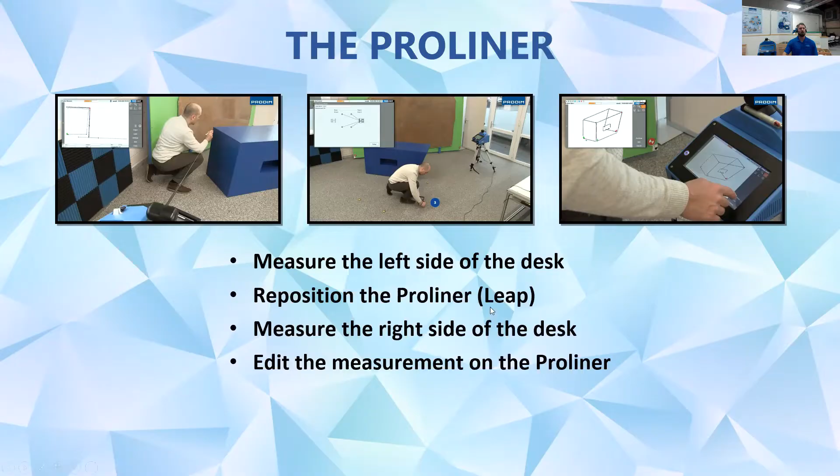So here we'll use a Proliner. It's our portable digital measuring system to record points on the desk. If you're not familiar with the Proliner, it's a contact measuring system, which the operator uses a pin tethered to the machine with a wire to touch the points on the desk. And then we use a remote to tell the machine when to take the actual points.

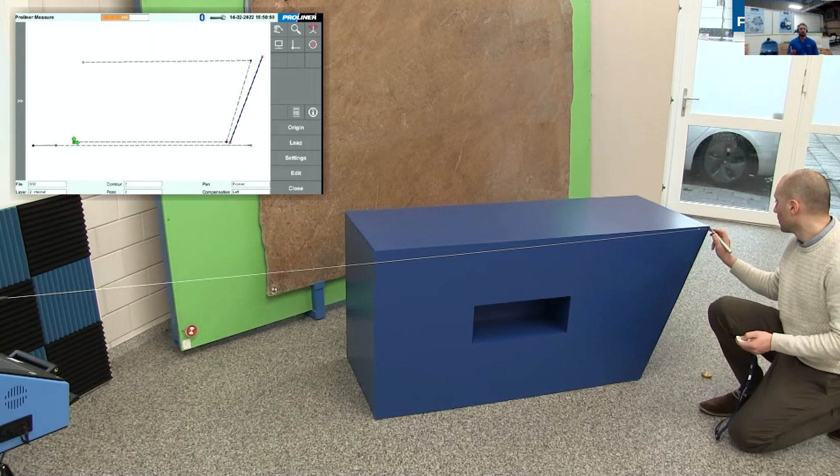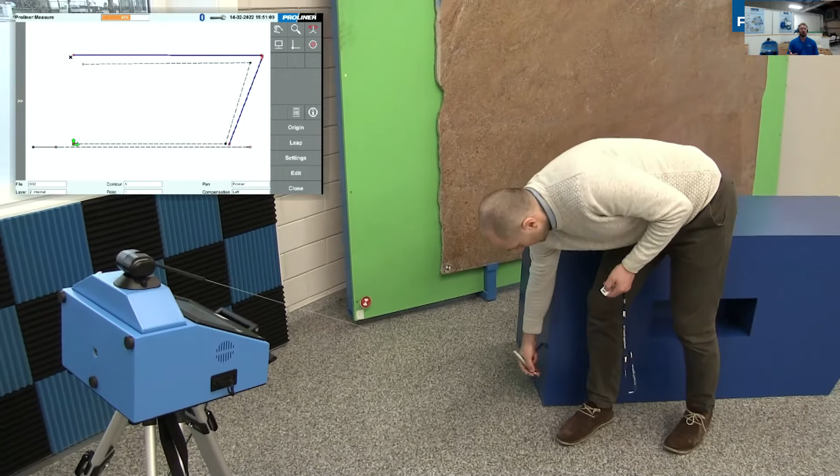The Proliner has multiple functionalities. We're going to be utilizing the multiple plane function in this video to show that you can measure multiple 2D planes and it shows them in a 3D space. So as you see, my colleague here measured a couple points on the floor to just show where the ground was, and then we change a layer or change to a new plane to set the plane on the front face of the reception desk here.

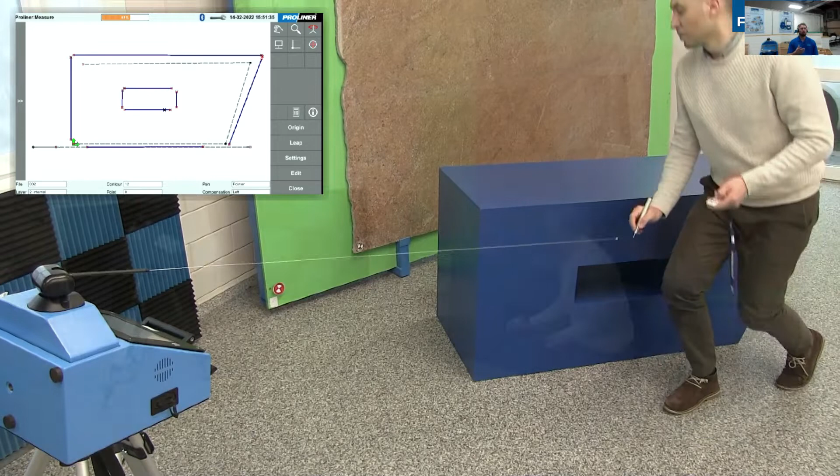And we're going to go and measure the perimeter, as you saw that he did there, and now he's measuring the cutout. If you're a Proliner user already, you know you just need 2 points for a straight line, and then we break the line to go to the new line there. And you don't want to measure directly into the corners because the CAD on board the Proliner will take care of filleting the corners for you.

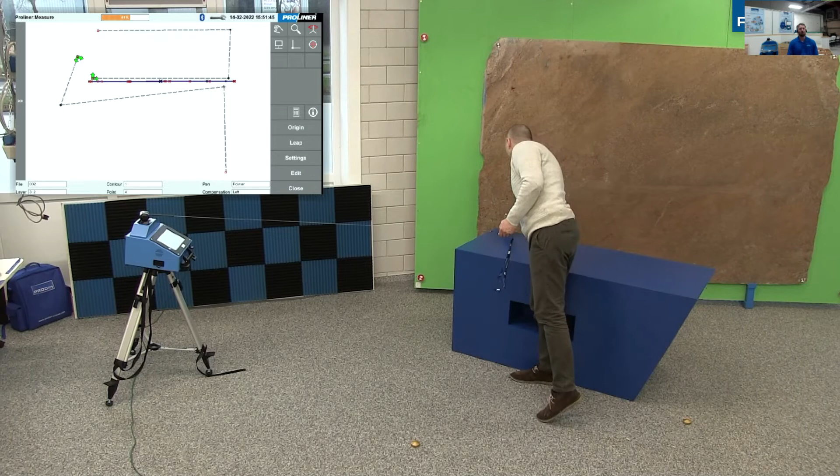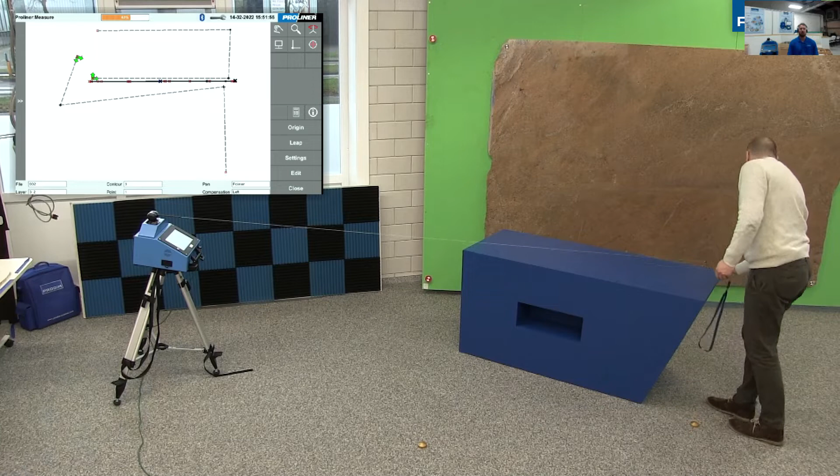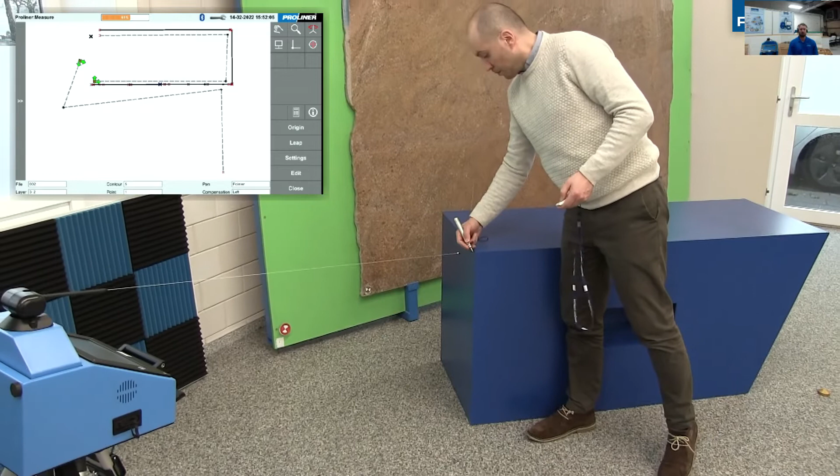Once we got the front face done, now we're going to move to the top face on the desk. Hitting and holding the 3 button on the remote allows you to change a layer or to change to a new plane. And the first step, like you saw in the video, he's going to set a plane on the top face so the Proliner knows where it's measuring to. And then you're just going to measure the perimeter. And you just keep moving along like this until you get every face that you can from that position.

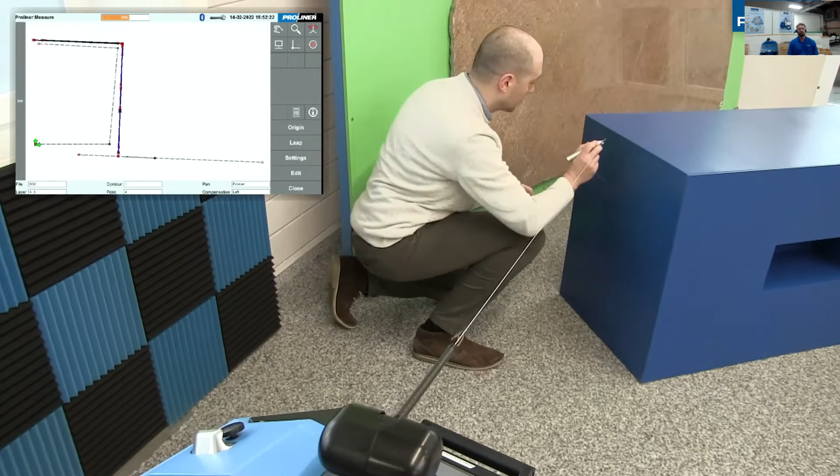So again, setting the plane on this left face, and then measuring the perimeter just by touching points on the face or the other faces of the object to be measured. And then we're going to measure 2 points for the floor. Now we can go back to the machine and sort of rotate the drawing. You can kind of see everything in multiple 2-dimensional planes, and it shows in a 3D space.

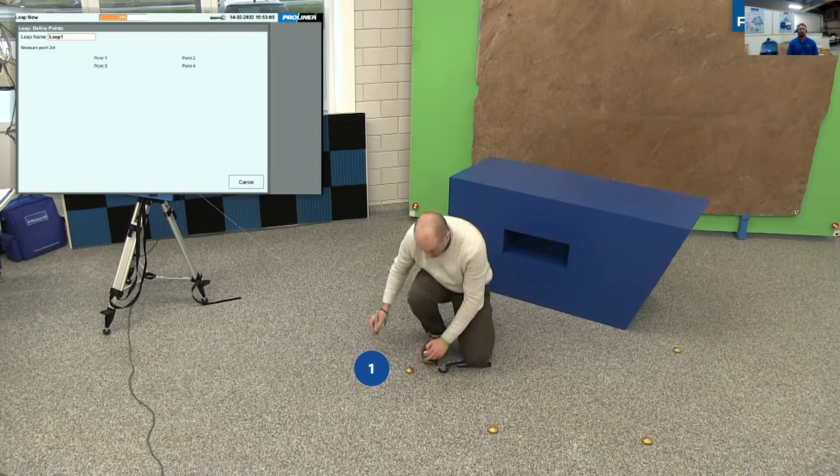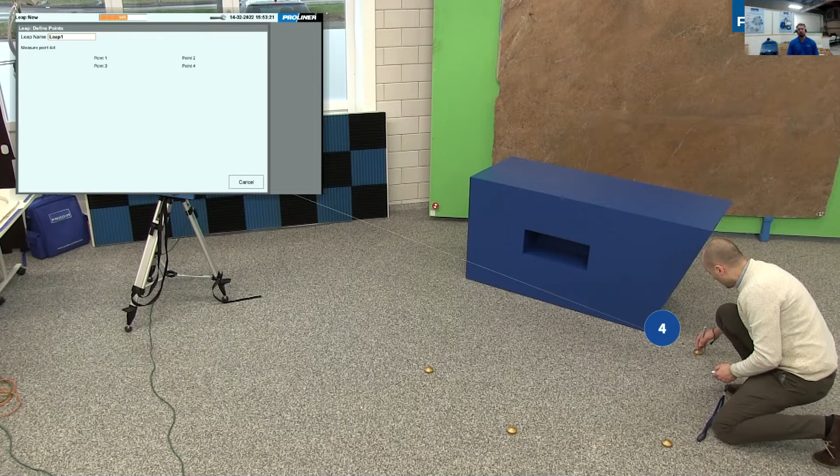Now we're going to utilize the leap function that's built into the Proliner. The leap function allows us to reposition the machine while still keeping the accuracy of the file together. So how the leap works is you have 4 points that you put in space. They can't be in a straight line or like a perfect square. They need to be in some sort of asymmetrical shape. You set those points out that you can reach from position 1 as well as position 2.

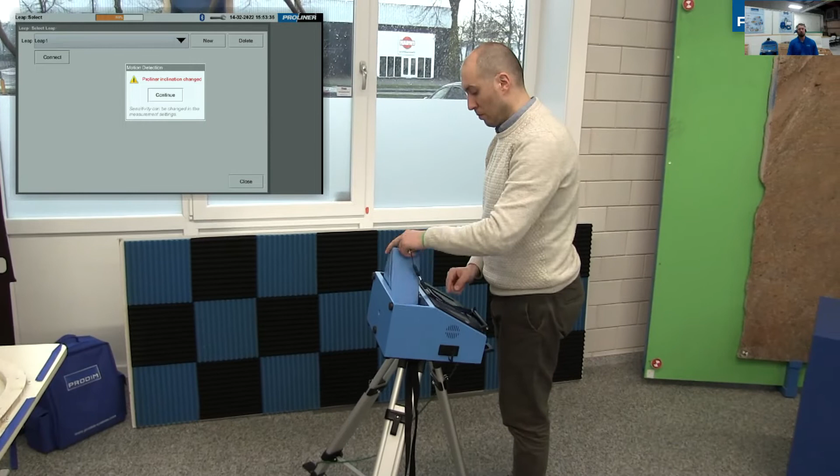And you measure those 4 points from position 1, you create the leap. Once the leap's created, we're now able to move the Proliner to position 2 so we can get the rest of the measurement that we couldn't reach from position 1. So we'll take the Proliner, move it over to the other side.

You see on the screen there, the Proliner has a motion detection or inclination change detection built inside of it. So if you don't want to move the Proliner and somebody accidentally kicked the tripod or something while you're measuring, it can alert you of that as well.

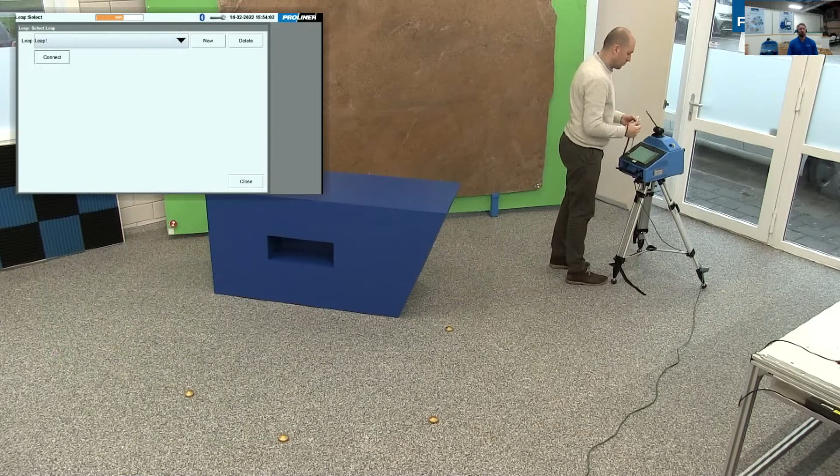Once you get it into position 2, we can connect the leap. So we created one leap here. We're connecting to leap 1, and then we're going to go and measure those 4 points again. The order does not matter here, which is very nice. You don't have to remember. And we also utilize 4 points, so that makes it the most accurate repositioning you can get.

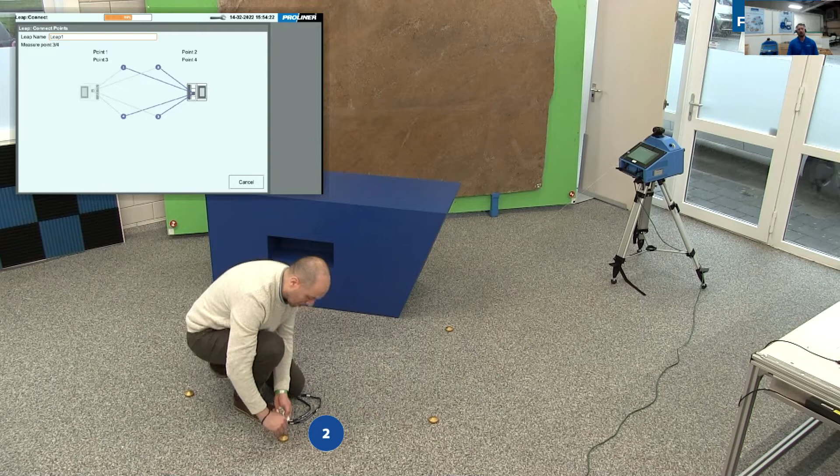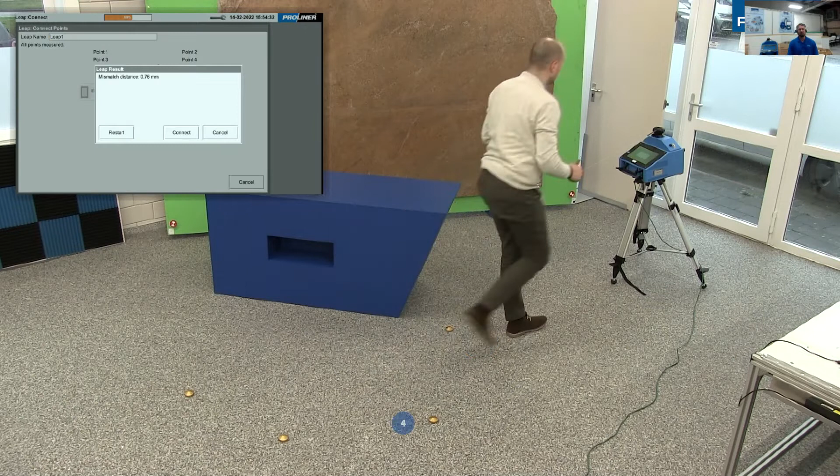You'll see here, it's going to give you a mismatch result of what the leap accuracy is. It's usually, as you see, about 0.76 millimeters, about 30 thousandths of an inch. And that's usually in tolerance with everybody. Once you are happy with the leap, you just hit connect, and then you can continue measuring to the side that you couldn't reach from your position 1.

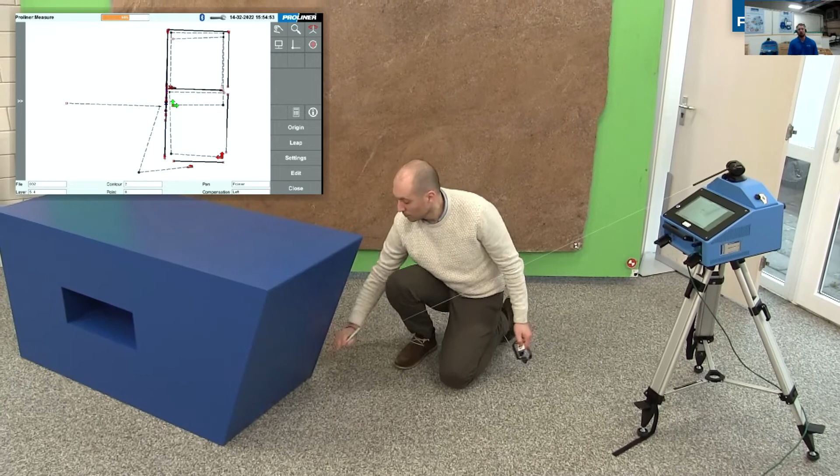This is a very versatile tool on the Proliner. It allows you to really be unlimited with the measuring.

And now we can measure this inclined angled face of the desk here. Again, just setting the plane and then measuring the 4 faces of it.

So that's the measuring process. Pretty simple, pretty quick. And we can go and view it on the Proliner, rotating the drawing in 3D to make sure that we got all the lines that we needed.

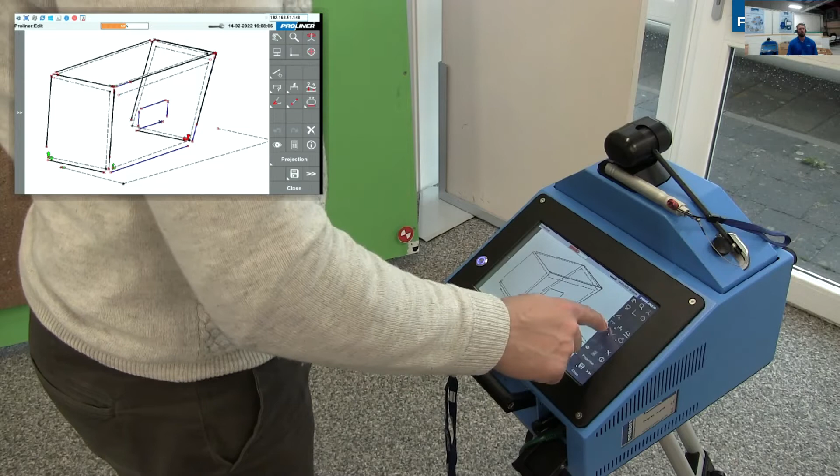Then if we hit edit here on the screen, this brings us into the onboard CAD software that's on the Proliner itself. This is our CT software. And what we're doing here is just labeling the layers, so when we bring it into the Prodim factory software, it's a little bit more organized. We know which face is which, which just allows for quicker processing of the file.

And this can be done, this is a really good tool to use, especially when you're measuring multiple planes.

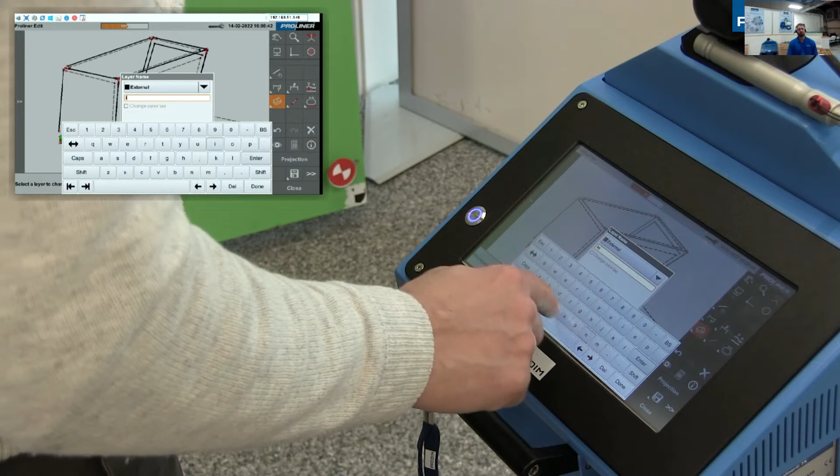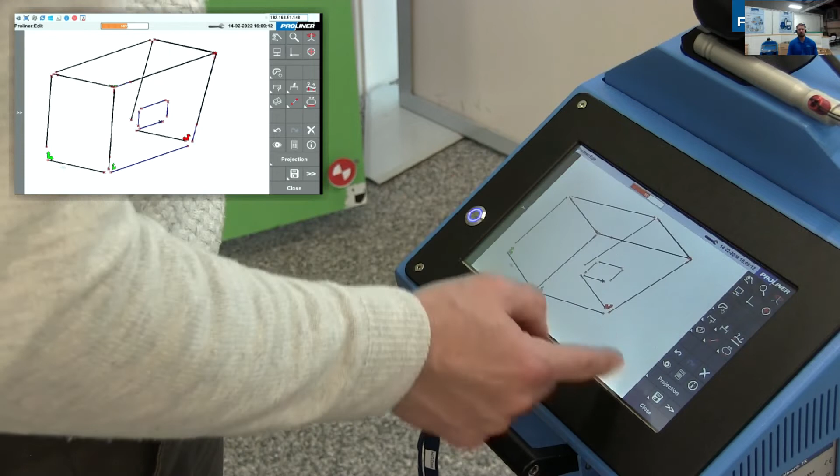Once the faces are labeled, we'll go around and delete all of our lines that we set for our plane, so it's unneeded geometry now. The Proliner will identify those. There's a function in the Proliner to make those a dotted line, so you can identify which lines are which. It makes the drawing a little cleaner and less confusing for you.

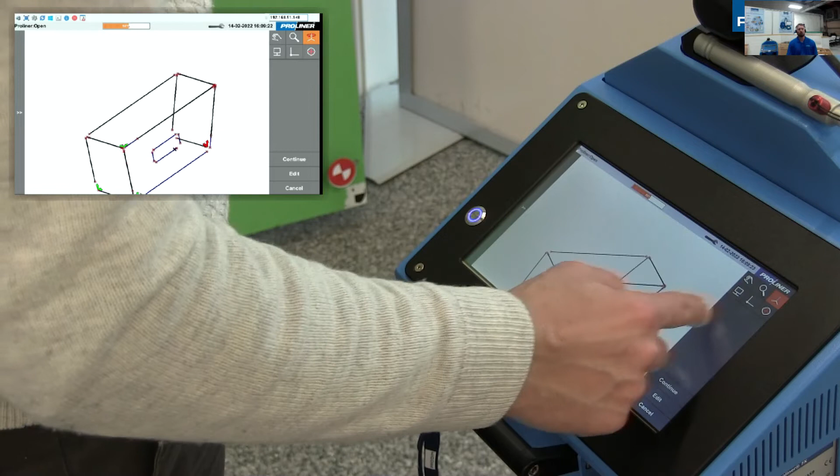Again, just sort of rotating it, looking at everything, making sure we got everything. As you can see, we have a layer list on the Proliner, which shows you the layers that are involved.

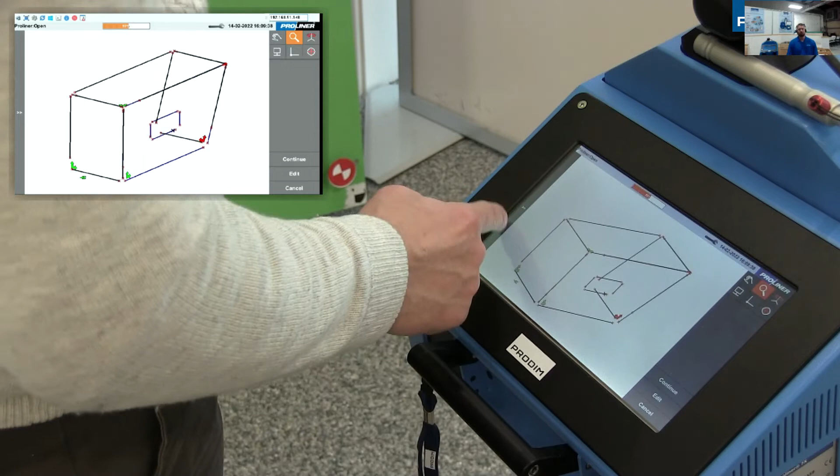And you can actually turn layers on and off, so what we're gonna do right now is single out one layer that you wanna work on to add your fillets and do any CAD that you need to in the field.

Right now, we're just filleting all the corners to connect them on this front face.

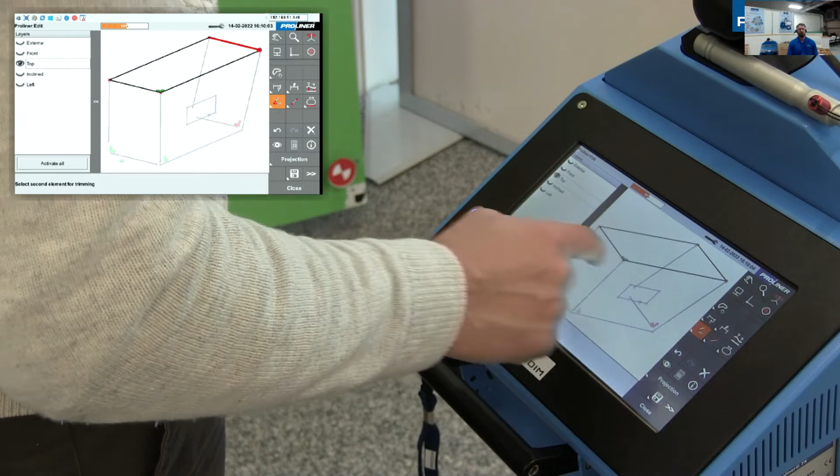Now we're gonna just isolate the top layer and enclose everything on the top layer. Same thing with the incline piece, and then on the left side.

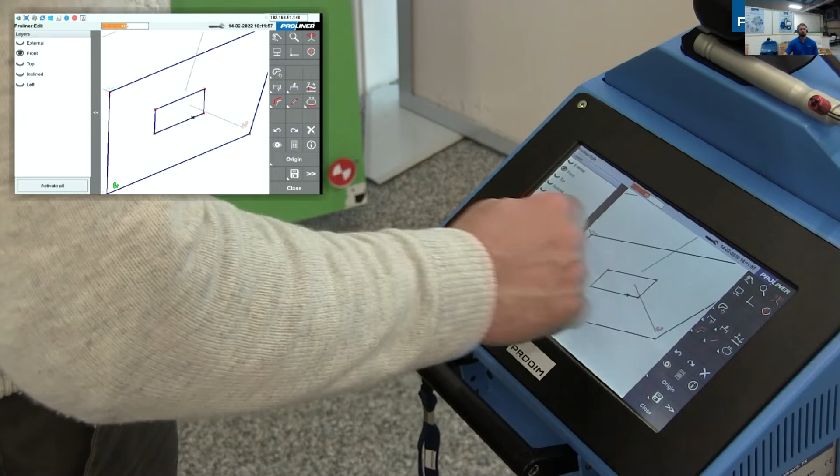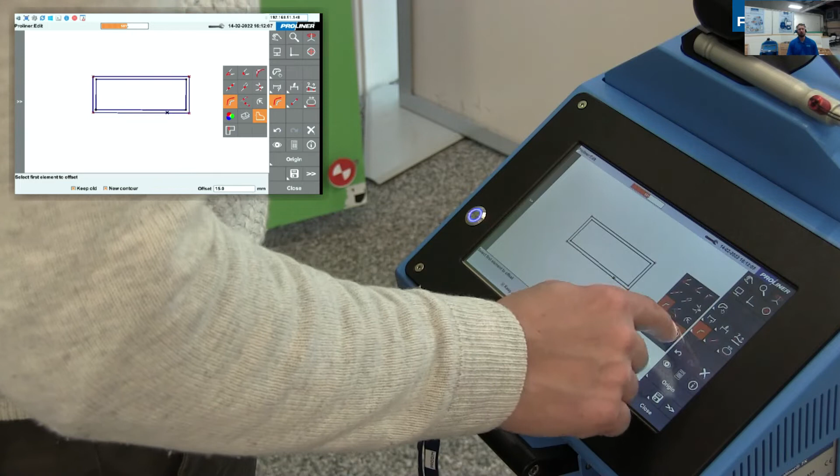We're going to origin out the drawing. Now you can actually utilize a feature in the Proliner to bring that into a top view. And what that'll do is now you can basically do your offsets and everything, looking at everything from a plan view.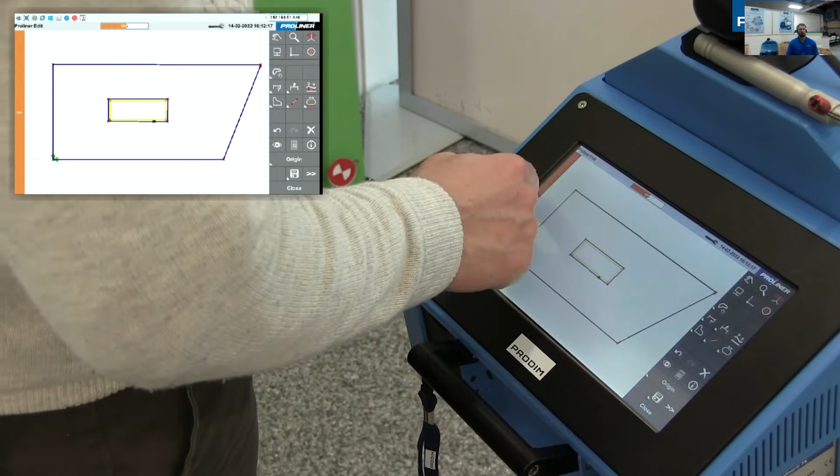We're gonna utilize the profile tool in the Proliner to label the particular edges here, whatever profile that we want to label them as.

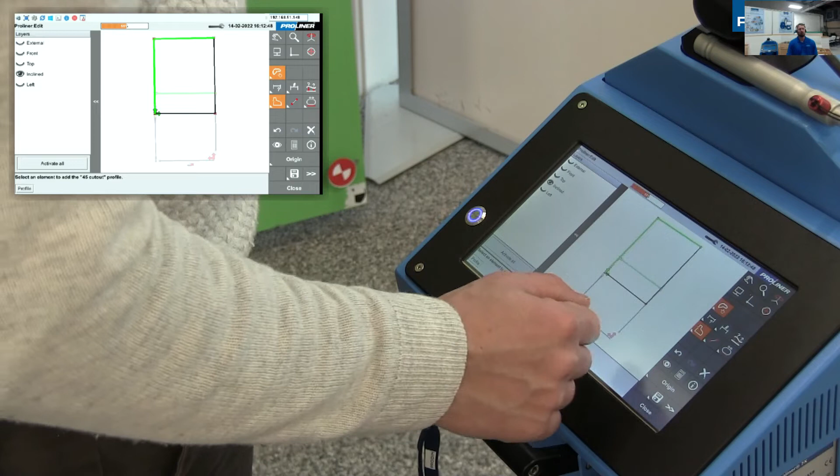So you can have a mitered profile. We have a 45-degree cut profile here, which is green. So every line that's going to be on that mitered profile will be labeled green.

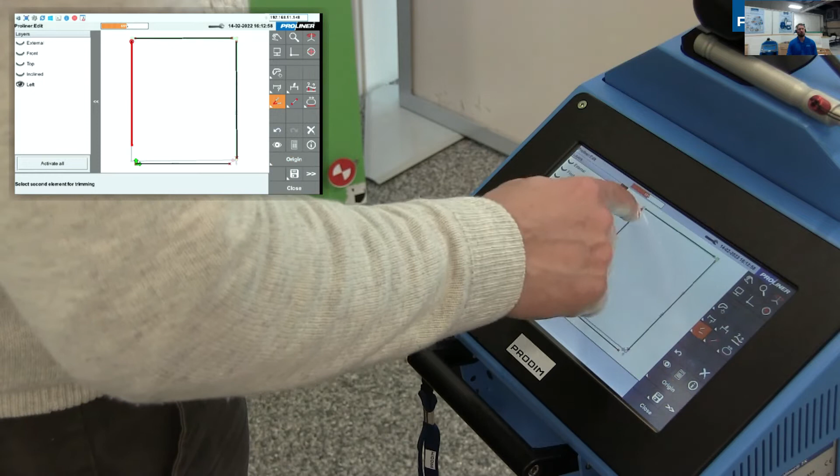We're going to go ahead and just close everything up on the left side.

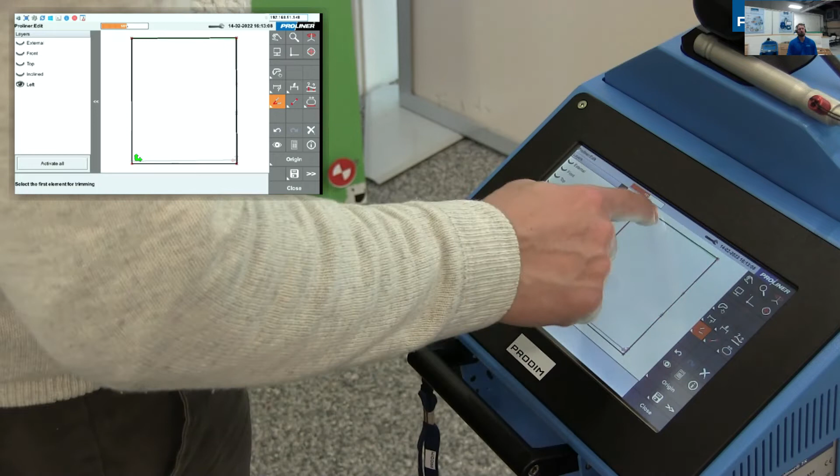Again, go back to our profile library. So the library in the Proliner, you can customize this and add all different types of profiles that you need to, or that is custom to your company, especially like if you're doing miters a lot. It helps identify which lines need to get that particular profile.

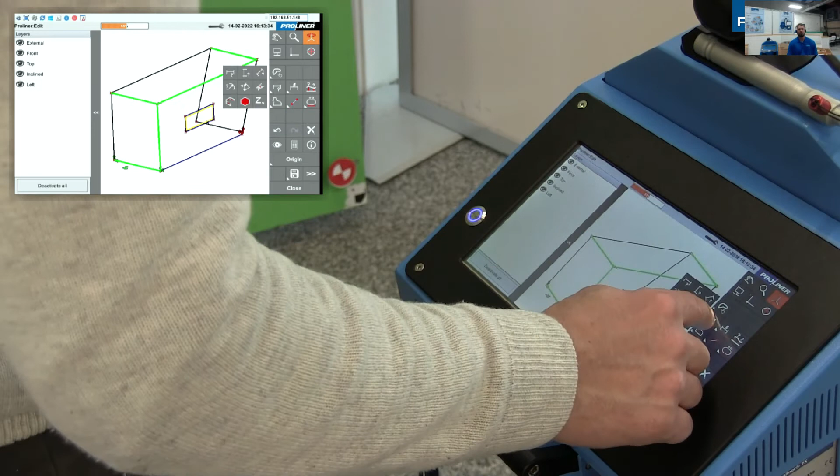Then we can add some dimensions here, just so you can verify this on site while you're here, just to make sure everything was done correctly before you leave.

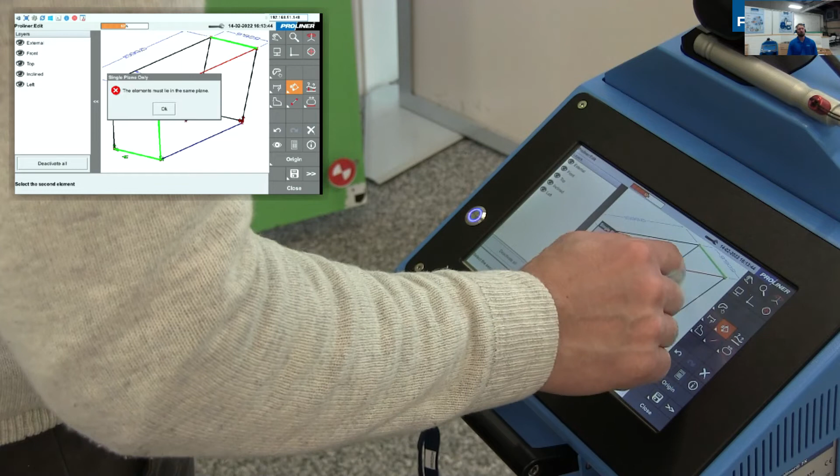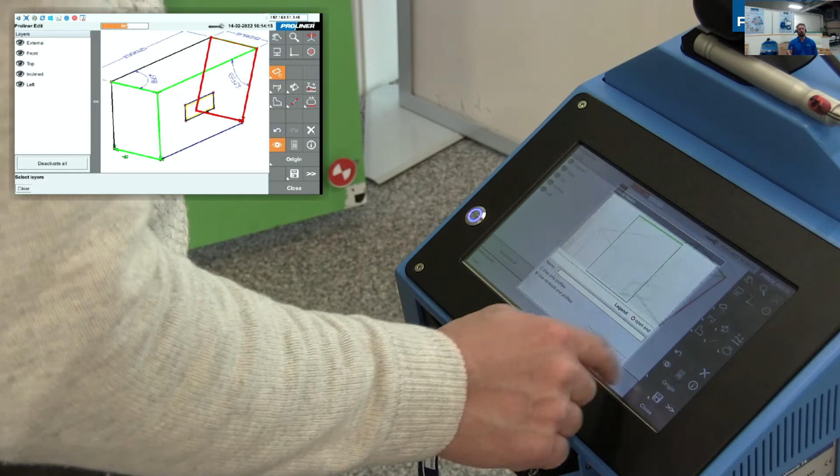Once we get all those dimensions there, we can create what we call production pieces. So these production pieces, or sketches, allow us to single out the particular piece or edge, because we measured this with 5 different planes. So we want to make a production or sketch piece for each of the 5 pieces.

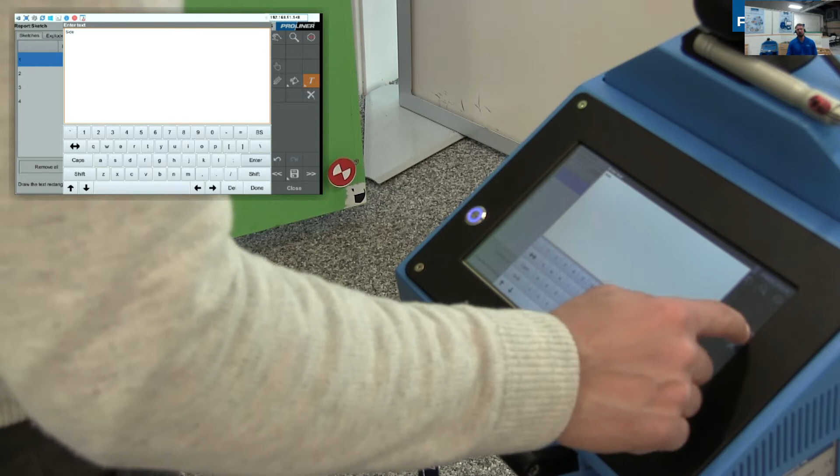And then we can bring it into the sketch or production menu on the actual Proliner itself. This is where you can add some notations and more dimensions here. This then will be exported out of the Proliner as a PDF file, so it makes like a production shop ticket for you.

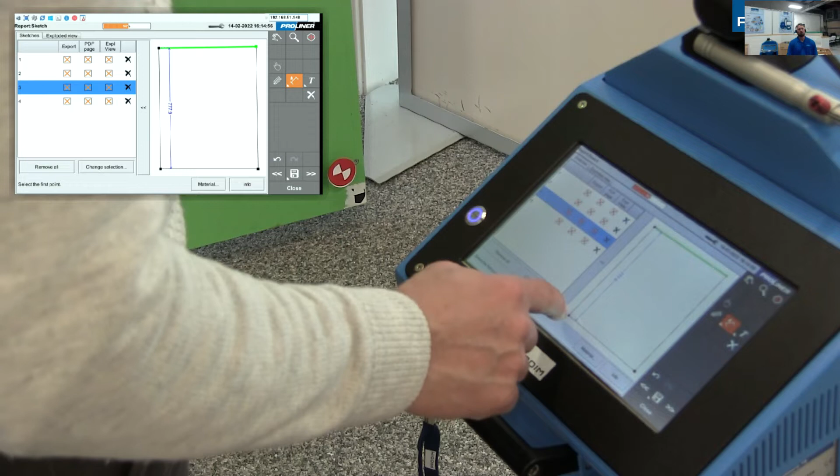See, we're adding the dimensions to each piece. Again, this is a really cool tool if you want to add any notations that need to go from the template to the shop.

Over here we can label, or customize this too. This is just some information you can add. You can make this custom template for your company and add stuff that needs to be added for the job, like who measured it, the date it was measured, the type of job, delivery date, things like that, residential or commercial.

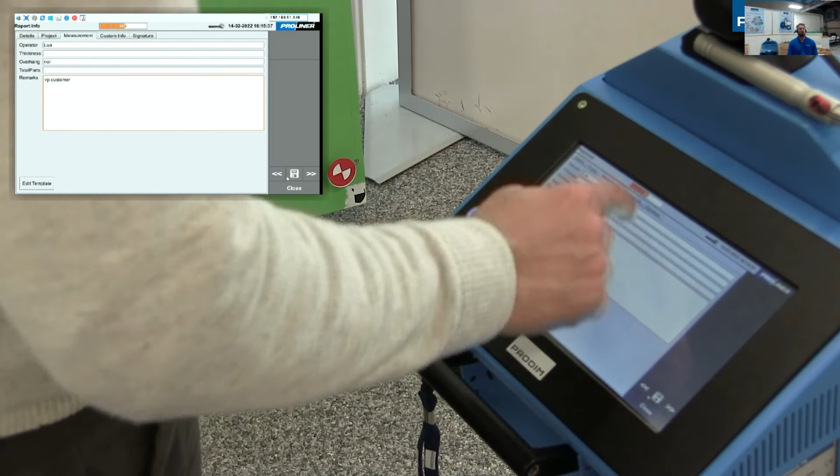You can also put different remarks in here, maybe if a customer asks for something. We'll sign off on the job, or you can have the customer sign off on it right there in the field on the Proliner.

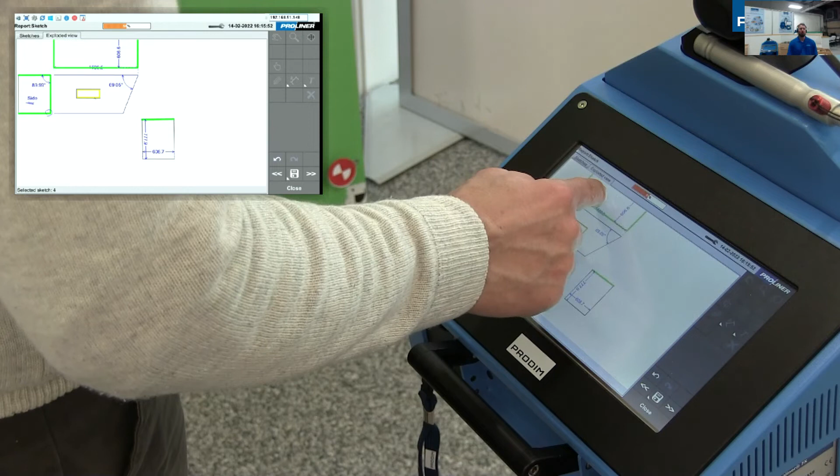And now we're just making the PDF, the shop ticket, nice and pretty, so everything looks put together when we bring it to the shop. As you can see here, we'll have a preview of it.

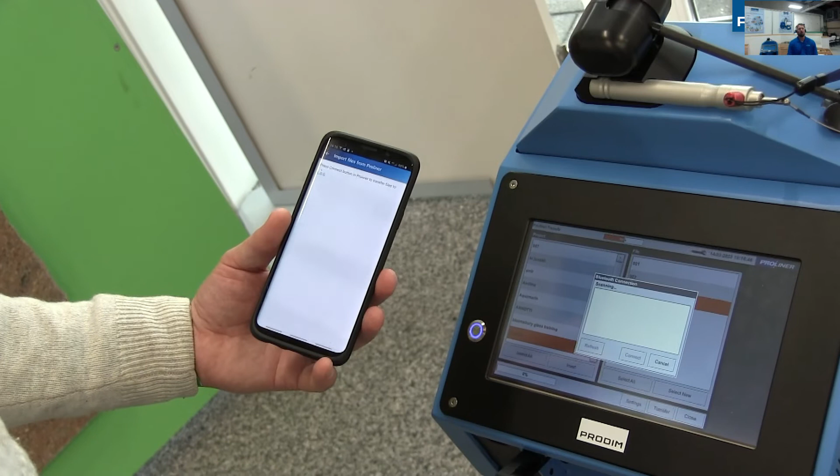Once we're done, we can export the files off the Proliner using Bluetooth to a smartphone. So we're scanning for the phone here, and the files will come directly off the Proliner via Bluetooth to the phone.

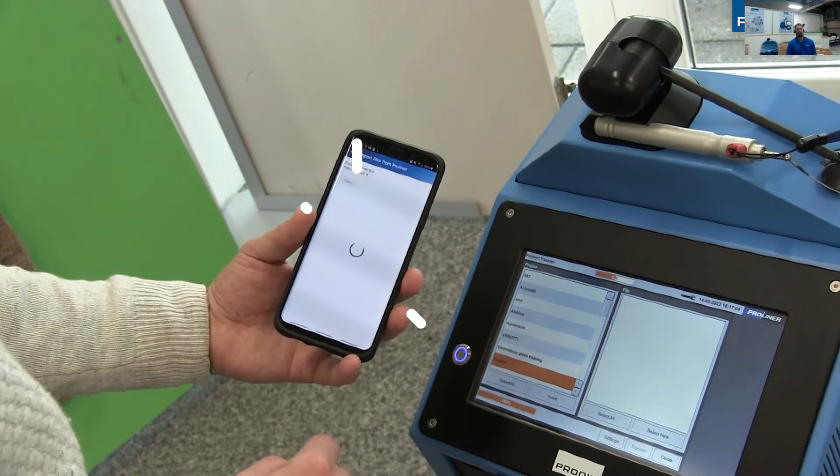Using the Prodim file transfer app, it's on the Google Play Store - you see the files just came over. You can also add pictures that will be tied into the same project folder.

And then you can export these right from the field from your phone and transfer them via email, and send them right back to the shop so they can start getting processed.

So the second portion is done with the Prodim factory software. Here we can finish all the CAD editing that needs to be done that wasn't done in the field. Most of it can be done in the field, but if anything else needs to be done, it can be done here in the Prodim factory.

This is where we can add all of our offset and thicknesses and bring it into the match portion of the Prodim factory software, where we can place it on a digital slab and create an actual saw layout that is CNC ready.

This is a little overview of what we're about to see in the Prodim factory software. Like I said, we can add the offset and the thickness of the actual material, and we're going to align all the parts.

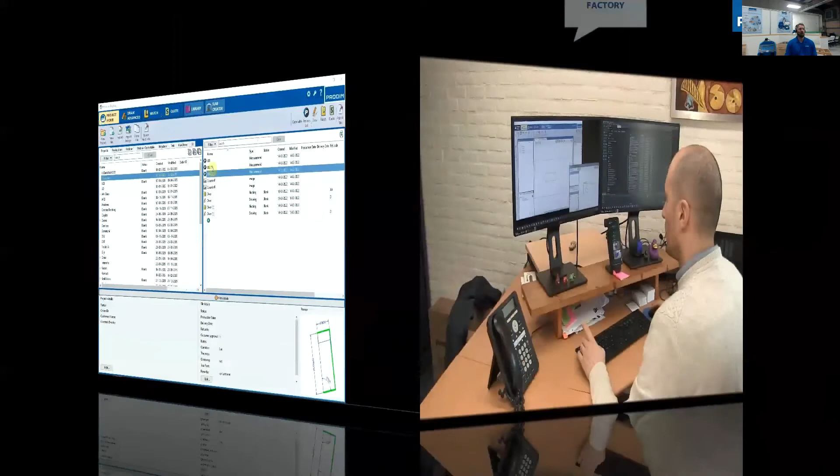All right, here we open it, and this is the Prodim factory software. So this is the project home where we import all the files into the factory software - it's like your file organization, sort of just like on the Proliner.

And when we bring it into the Draw Advanced feature on the Proliner, this is where we can actually view each piece individually, as well as in a full 2D, 3D view.

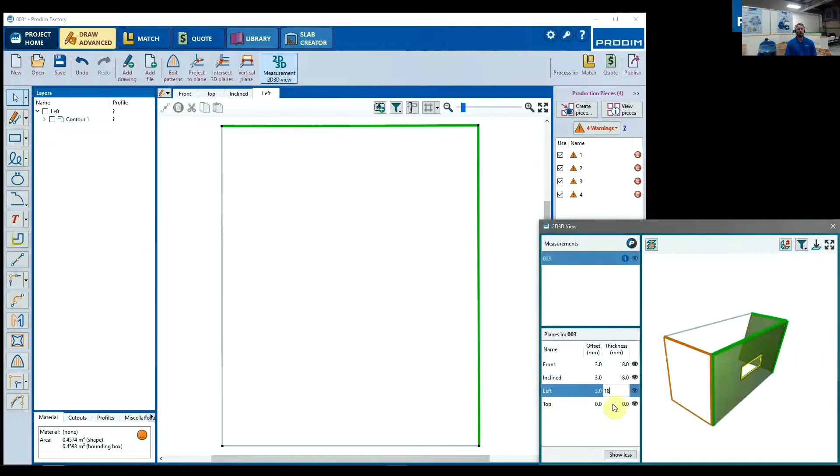And what we're doing now is we're just adding the material thickness along with an offset. You see the profiles that we added in the field have already carried over into the Prodim factory software, so that saves you a little time.

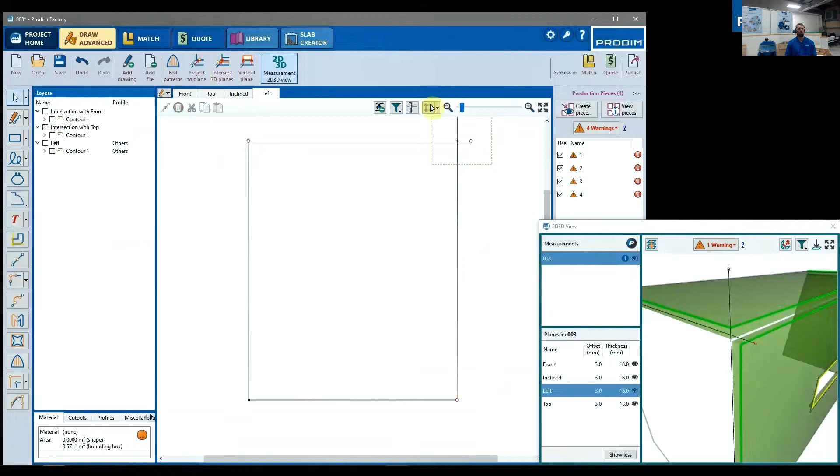And now, since we added the offset there, this is basically just growing the piece with the thickness already, to adjust so we can actually get the miter correct from the left face to the front and the top face. You just reassign the profiles, and now you see we have a nice clean left piece that's extruded for the material thickness, and it will fit together with the other pieces.

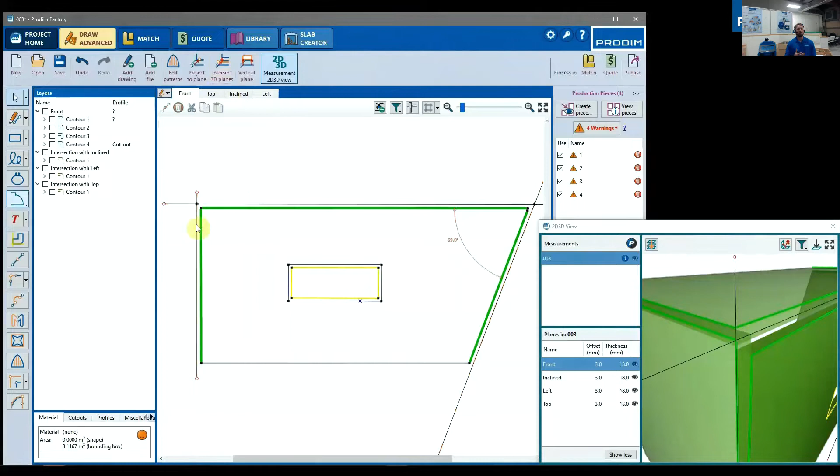So we're going to do that for each side. Basically, in the software, you can intersect one plane to another, and then we just go around and trim the new lines together to grow the piece to match the other pieces, because of the thickness of the material.

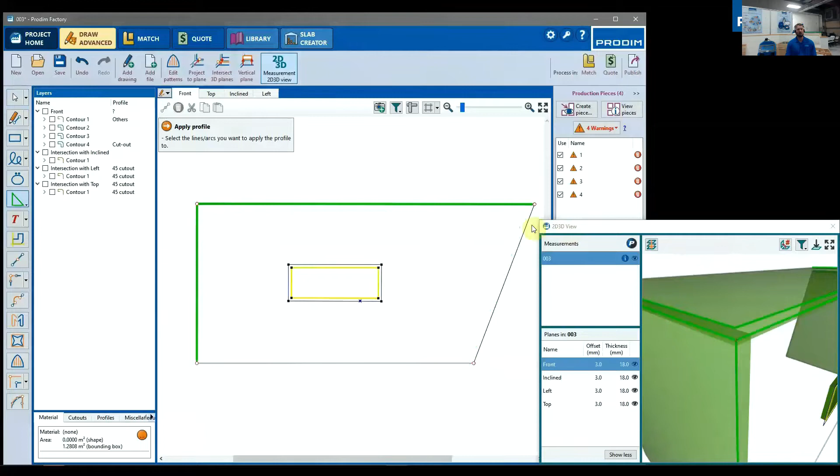Again, as you can see, the profiles came in, but you can also add profiles in the Prodim factory software. The library feature in the Prodim factory software is how you can build your own custom library to add to the Proliner, as well as add it to the Prodim factory software, so both your libraries can work in unison with each other.

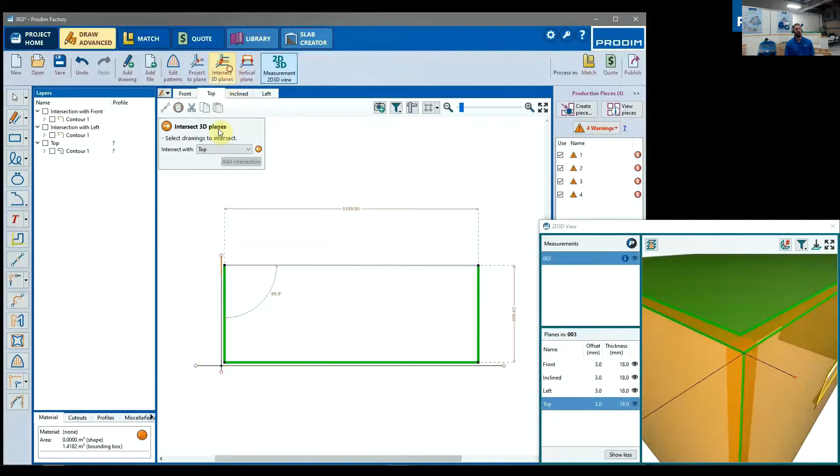Now we're going to work on the top plane. As you can see here, when we labeled everything on the Proliner, you can see they came in here - front, top, incline, and left - nice and labeled from the Proliner already. So again, that saves you some time by just doing a little bit of editing in the field.

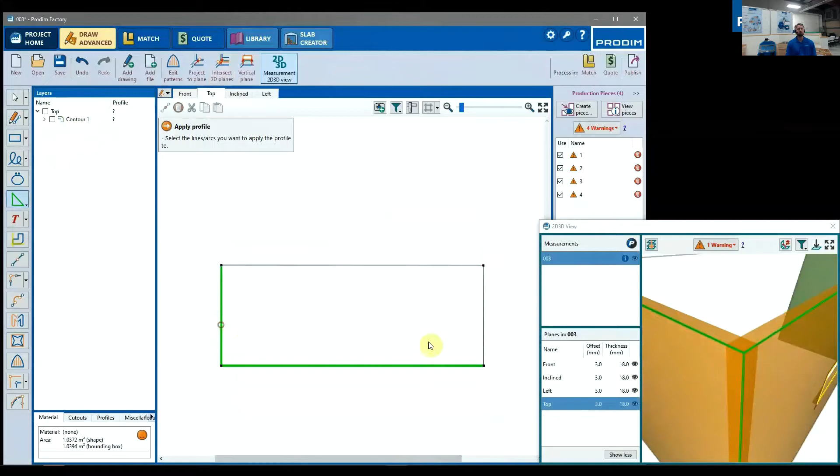We're going to assign our 45-degree miters.

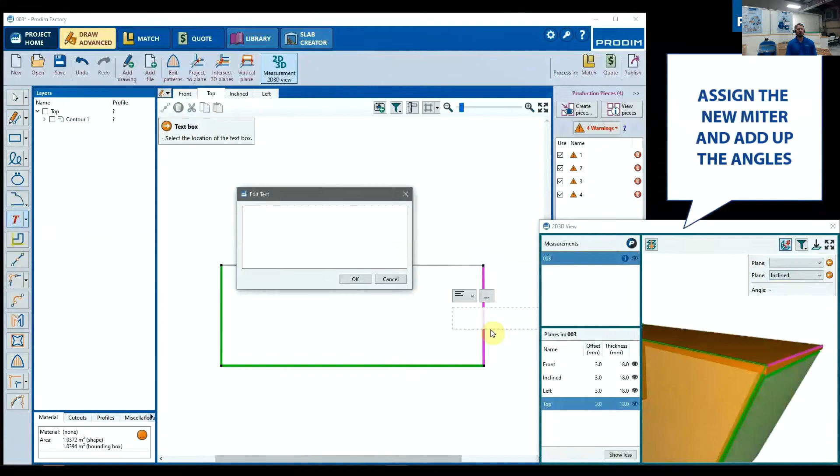And on the right side is that incline piece, so that piece is going to be a different miter. We can actually come in here and check the angle between the two pieces - it tells us it's about a 70-degree angle. So now we know we can do a different miter on that piece, and we can actually add a text box here, so when we create the production pieces and they go out to the shop, they know this needs to be cut at a different angle because of the inclination of that piece.

Makes it very nice and easy just to label it. It really eliminates mistakes.

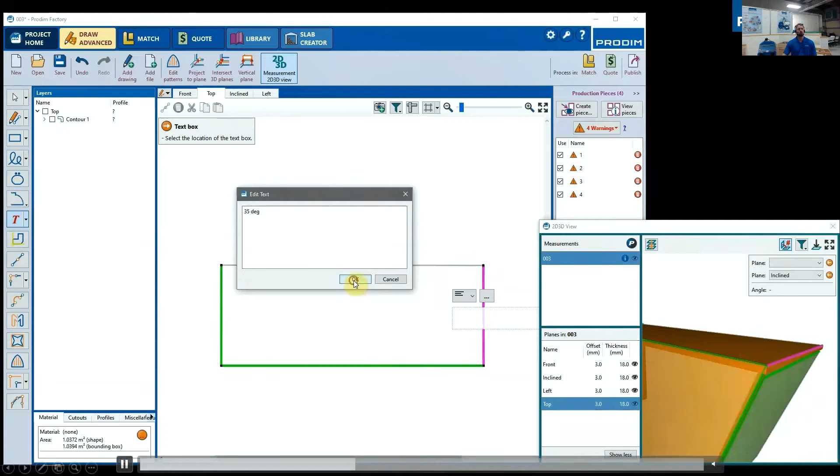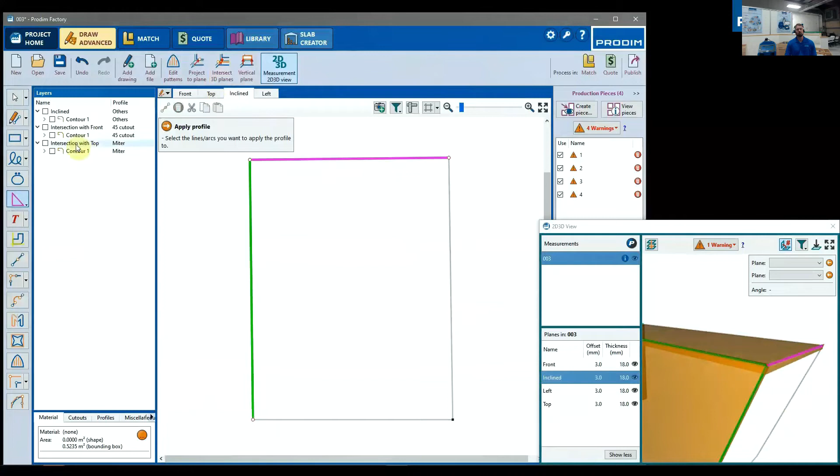Now we're going to grow the incline piece to match the other pieces. And now we have the whole desk with the thickness of the material added to it, as well as grown, so every piece is matched up with each other.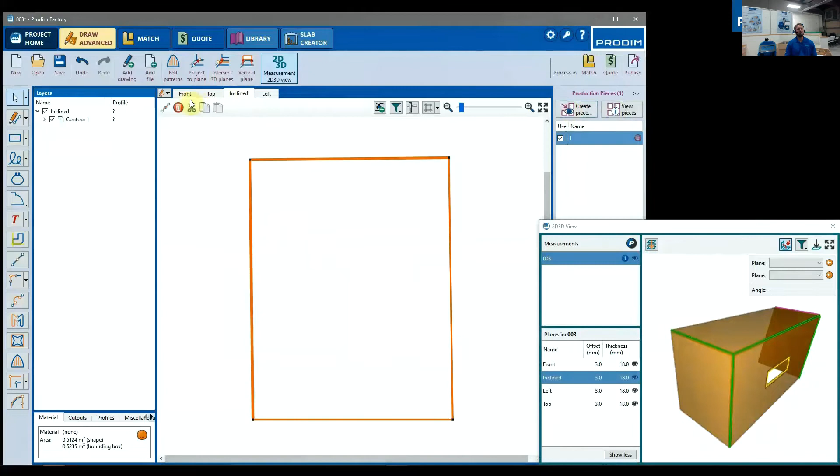And now we can create production pieces. So we bring these production pieces over into the match process where we actually match these pieces to the slab. We want to make these all singular pieces so we can move them around separately to get the best match possible according to the vein or the material.

You can come in here and label each piece. We're just simply labeling them.

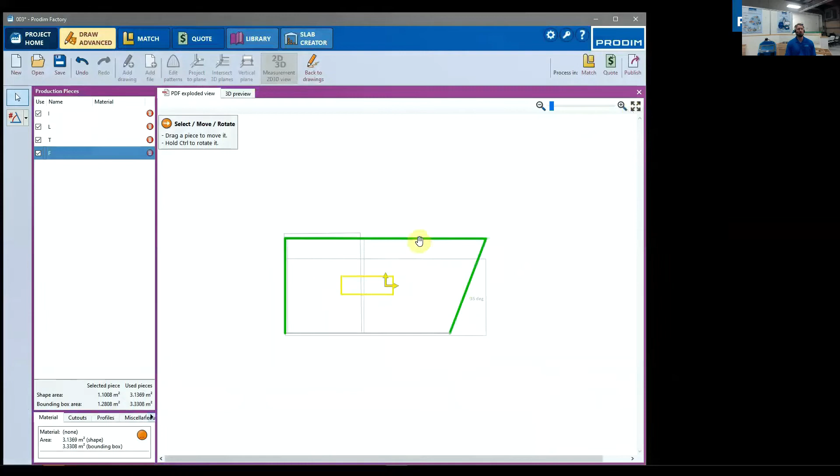And now we can come in this part of the software, we're also creating the PDF portion. It creates a nice shop ticket, just like you can do on the Proliner, but it also brings this - when you bring this into the match, everything will come aligned like this. So this will be like your 2D top view.

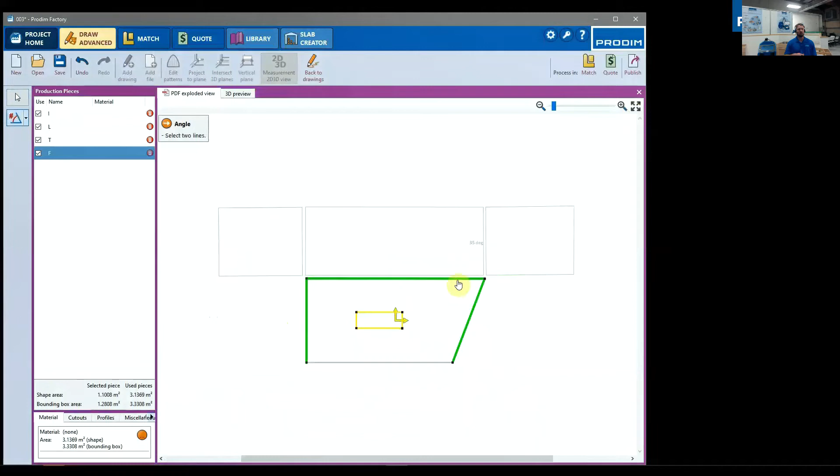When you view it, you can move the pieces separately, but when you view it in the software, you'll see each piece where it's supposed to lie, like if it was planed out.

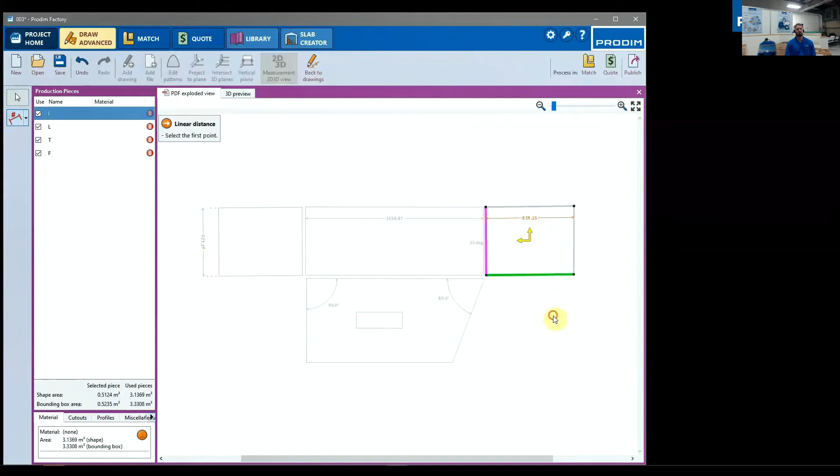Again, we can throw some dimensions in here to verify everything, and add some notations. Eliminate mistakes by just adding as much information as possible.

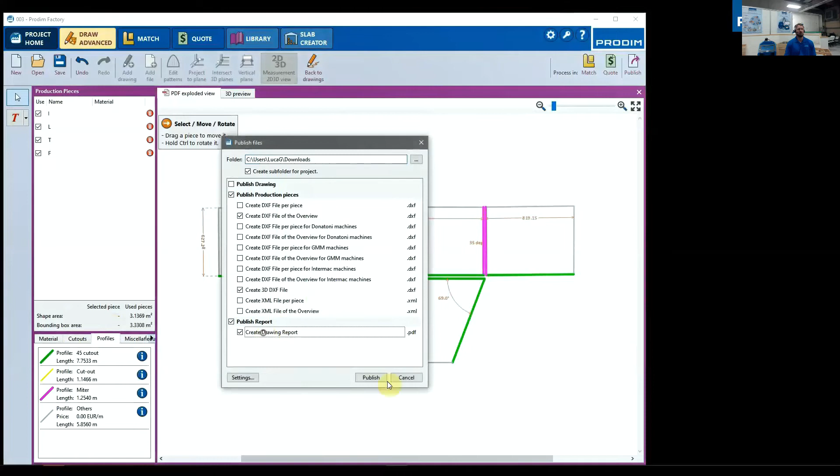Now we're going to publish this. We want to create a DXF of the overview here, as well as a PDF here. And this is the PDF. The shop ticket that is created is really nice - it gives you a little legend on the side so you see which profiles are used.

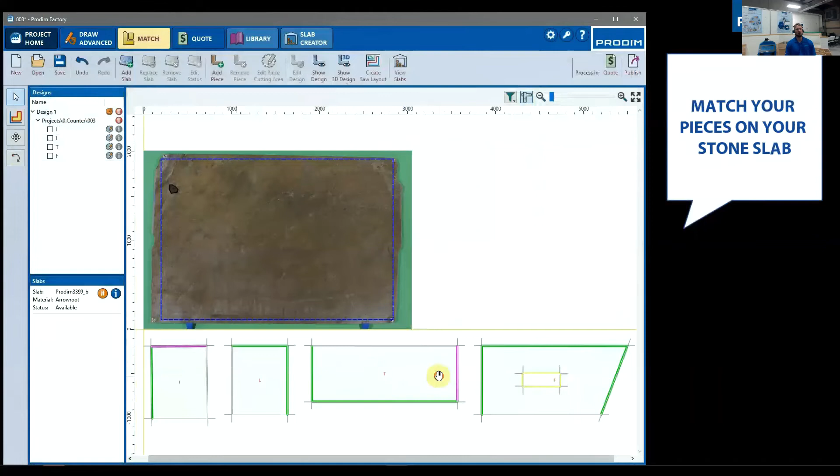Now we're going to bring this drawing into the match portion of the software. Here you can choose a digital slab from your digital slab library that you've created using the slab creator portion of the Prodim Factory software.

And we can basically take our pieces that we measured, each different face of that desk, and we can move them around on the slab. As you see, you can move them in unison on the one screen. They also move in real time on the other screen, so you can match both ways.

Now with these profiles, you can actually add a cutting operation to these particular profiles - you give it the thickness of the tool being used to cut the material, and it will give you an accurate layout of what will happen. As you see, there's an overcut there that would go into that other piece, which wouldn't allow us to bring the top and the front face close to the left and right faces.

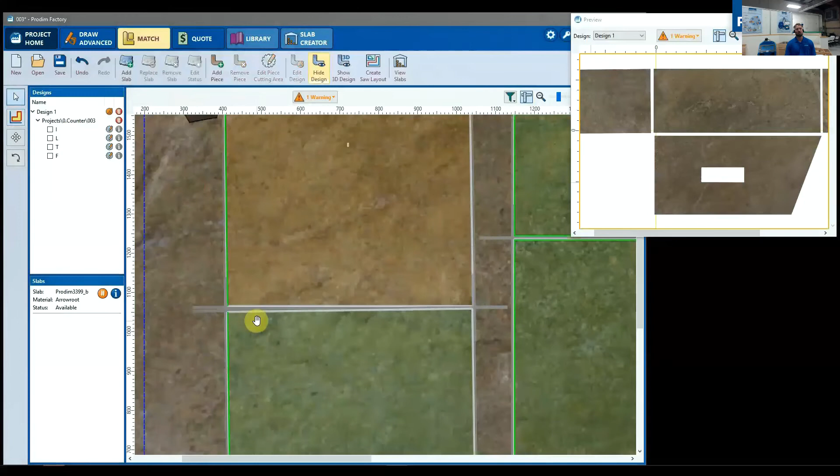And you can also use the alignment tool in the match software to align these pieces so the saw cuts each line on the material. Basically it uses it as one cut, so to save cutting time.

Then we can view it in 3D. This is nice to show customers, or even just in the office to make sure everything looks great in 3D.

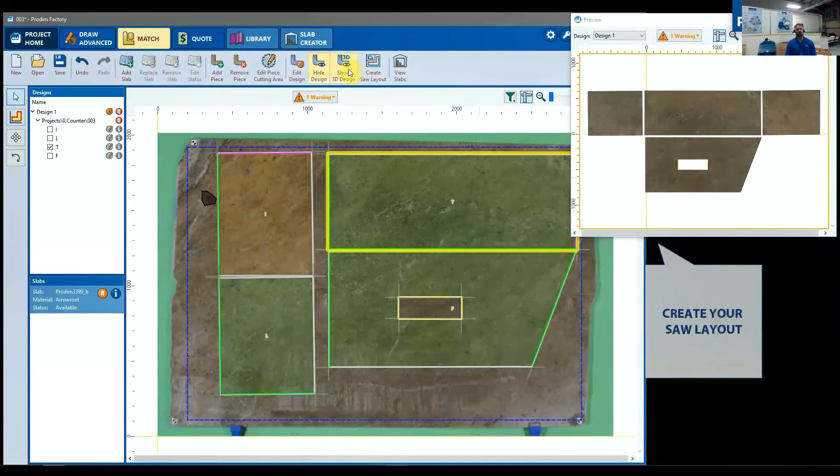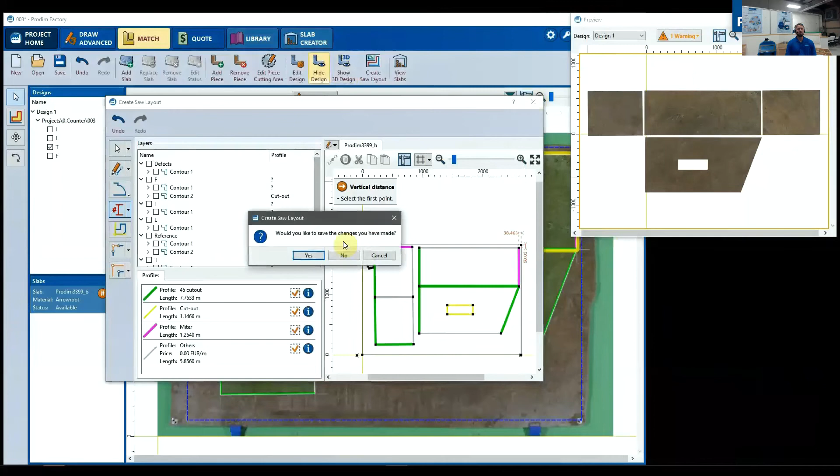And once everything is put together and we're happy with the layout, we create an actual DXF of the saw layout to bring to a CNC machine. And just like in the draw software, you can add dimensions here, so we verify when you put it on the saw table that everything is going to be lined up correctly.

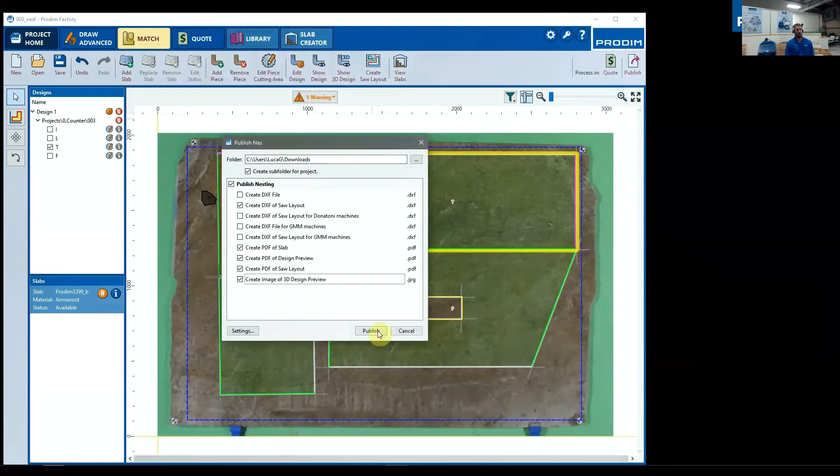Then we can save this nested file and export this as a DXF as well as a PDF to go along with the job. So now you have a PDF of what the pieces will look like and the saw layout. Again, you see the profiles on the right side.

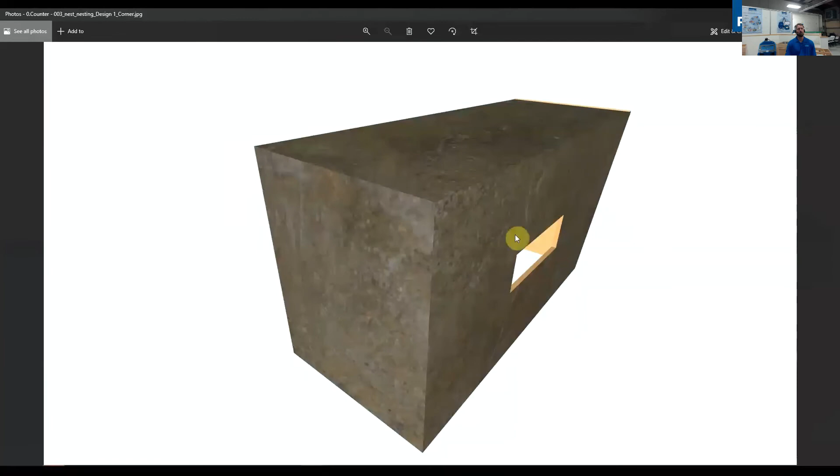And this could be for the customer to see, to approve.

Once we're done with that, we want to save everything because we're happy with it. And you see here all the pictures that were taken on the Proliner file transfer app have also transferred over.

And that was the whole finished process. Once you get those files exported out, they're ready to go to the CNC.